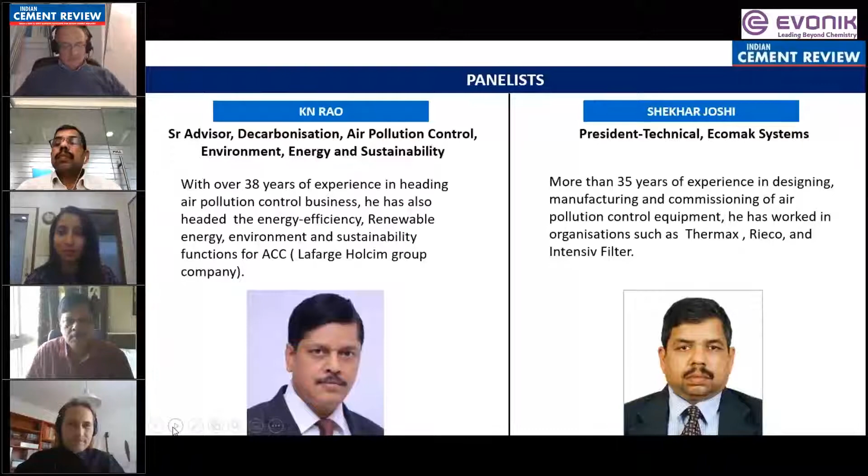Giving a perfect start to today's panel discussion, Dr. Santorsola and Dr. Rathwallner are going to make a presentation. Dr. Santorsola will introduce us to the P84 fibers, while Dr. Rathwallner will showcase some success stories of cement plants in India where P84 has helped meet emission requirements after premature failures. So with that, over to you, Dr. Santorsola, to take this forward.

You should be seeing my desktop, gentlemen. Good afternoon, everybody, and welcome to this first webinar for India, giving your process filters a second life. I would like first to introduce P84 fibers to all attendees by showing this image of natural gold yellow fibers. You may retain this information from this slide: P84 is the only hot gas filtration fiber presenting an irregular and multi-lobed cross-section. P84 staple fibers and multi-filament are available in the Evonik portfolio.

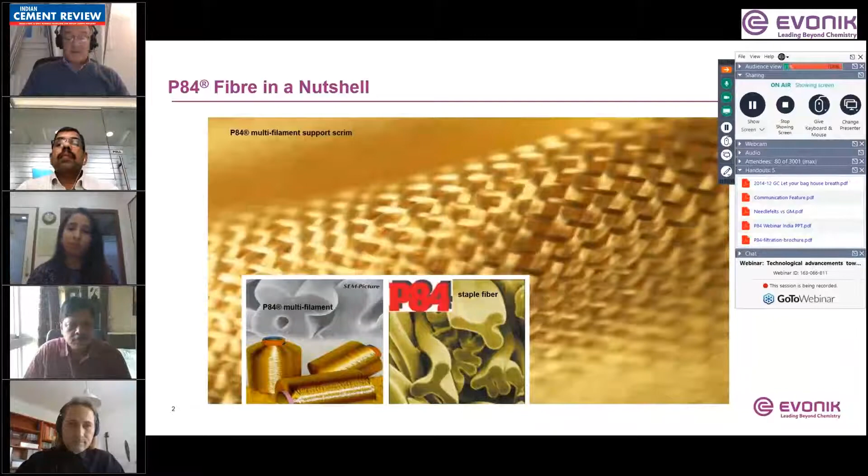A little bit of history of this fiber. It was born in Austria back in 1984. It was immediately clear to us that its most important characteristic was the multi-lobed cross-section.

For more than 30 years, we at Evonik have delivered to the cement industry effective solutions for hot gas filtration thanks to the properties of our P84 fibers. Recently, we have increased the range of P84 fiber qualities with the 1.3 dtex, and last year we launched P84HT, an optimized version of our fiber with unmatched thermal and mechanical properties.

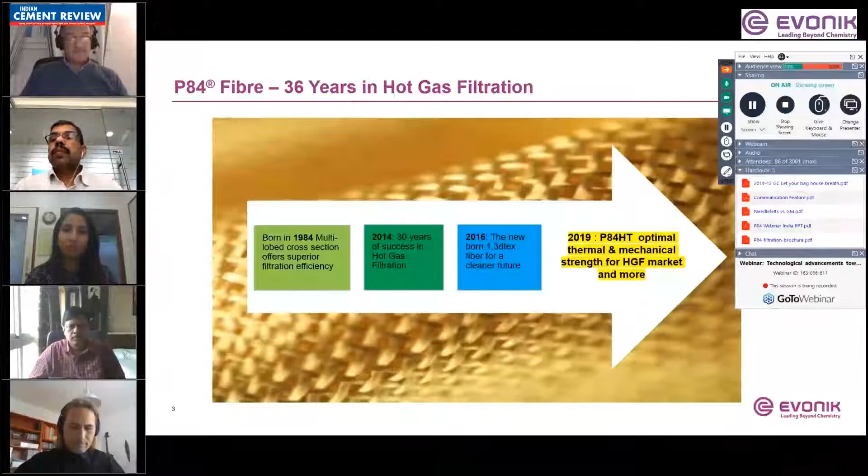Here we are. This is a picture showing where P84 has its home. We have the only production site in the world, located in Schörfling and Lenzing. The spinning is located in Lenzing, and the after-process and the offices are located in Schörfling. This is in the lake area of Austria, a very nice place near Salzburg.

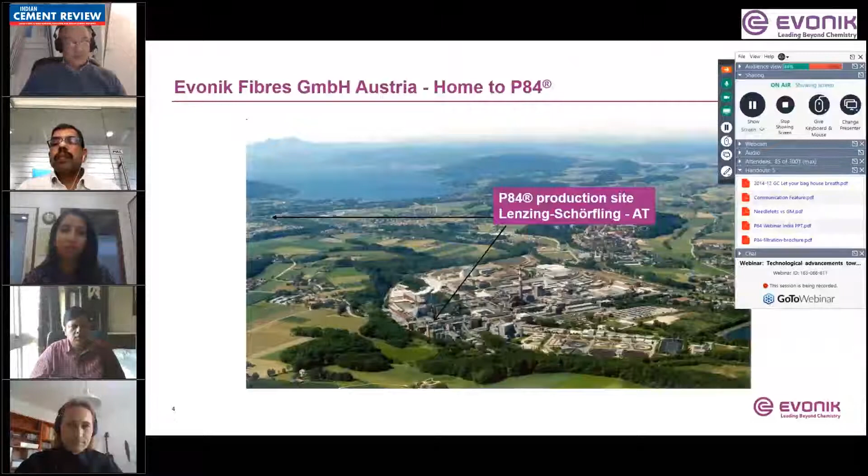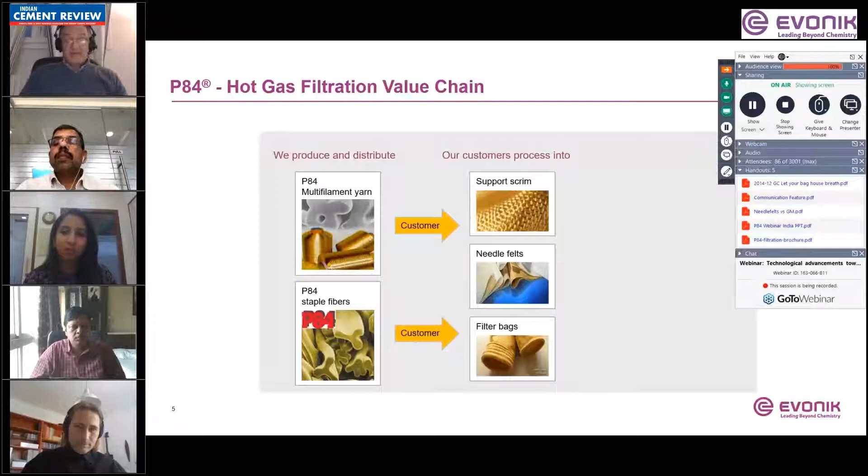Now, a few words on the hot gas filtration value chain. Evonik fibers P84 staple and multi-filament are offered to our direct customers in the textile industry. They are able to process P84 into support scrim, needle felt, and finally, ready-made bags, which are delivered to your cement plants, as you can see from this animation.

Since our position in the value chain does not allow us to serve you as vendors, we have developed a wide range of services, creating good value for your operations and allowing us to share our more than 30 years of expertise with you. Our very well-equipped laboratory of chemical analysis and our skilled colleagues offer you the possibility to verify the composition and construction of your filter media, your filter bags, and their chemical and physical condition even after several years of service, thanks to the use of specific analytical instruments.

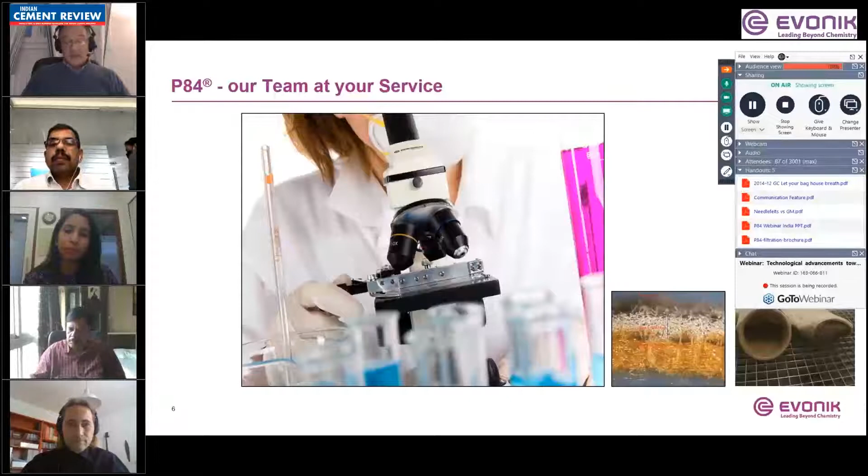Furthermore, we are glad to assist you in recommending dedicated filter media for your most challenging applications. We are also able to assess the performance of existing filter bags and execute in situ gas measurements.

Now, I would like to guide you through a brief description of the two major categories of filter media. Let's begin with the well-known woven glass with expanded PTFE membrane.

This filter media is characterized by a PTFE membrane laminated onto a glass woven base. As we see, there's a very thin line attached to the woven components, which is the dark blue or light blue one. The membrane is actually the only part which does the filtration, but it is also fragile.

It must be really protected during storage, handling, installation, and operation. Otherwise, abrasion can occur easily, and abrasion of a PTFE membrane is equal to emission at stack.

You see also that during operation and after pulse-cleaning, the PTFE membrane remains almost totally exposed to the gas flow. It doesn't retain much dust, as you see from this picture.

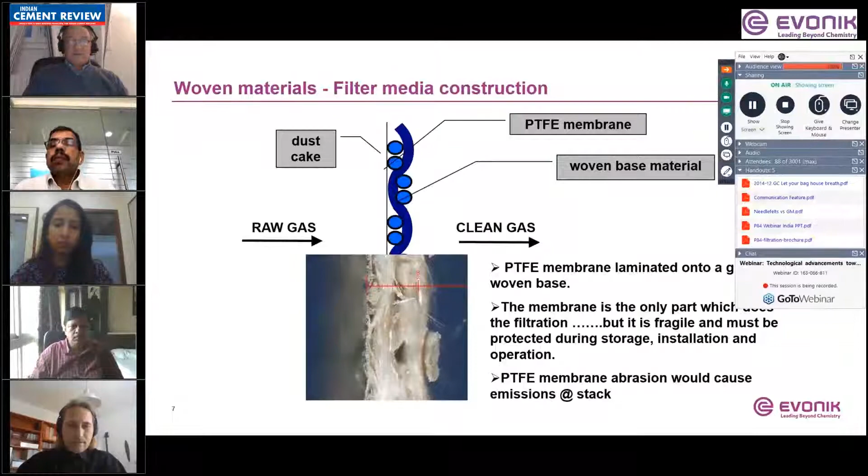High-performance needle felts are a very different type of filter media, different from the previous one. As you see, they are characterized by a three-dimensional structure where there is a supportive scrim between two non-woven fiber beds. In this case, P84 ensures a porous and permanent dust cake during operation.

I would like to show what happens during the initial phases of a P84 bag pre-coating. You see that a certain amount of dust is coated onto the fibers, and only after process dust arrives can we allow jet cleaning, which removes the dust from the process but leaves the pre-coating dust there, effectively protecting the filter media.

High efficiency filtration, in fact, is a unique characteristic of P84, together with its mechanical resistance compared to the PTFE membrane mentioned before.

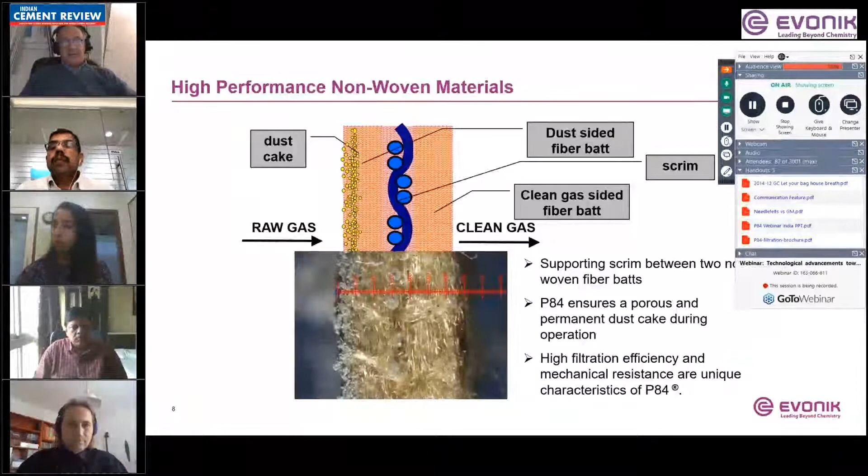And here is a nice cross-section of a P84 needle felt after operation. This one is even better. This image refers to a cross-section of a P84 needle felt, again, as I mentioned. The most important feature here is the formation of a porous and permanent dust cake, which plays a determinant role in preventing fine dust penetration and the consequent increase of pressure drop across the filter.

By achieving these two important targets, the bag life is also extended. You can really see how well-defined the dust cake is on the P84 filter media, and the rest of the felt is totally free from dust and free to breathe, allowing good operation for your plant. So we have a certain number of benefits offered by P84, which include low pressure drop, low emission, and long bag life.

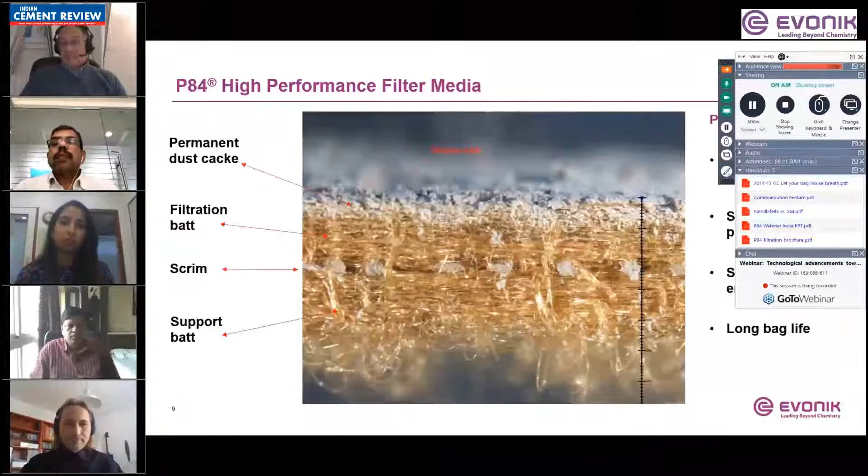But how to explain this particular high performance of P84 compared to any other fiber in the market? To do that, we have to go back to the structure of this fiber to understand its behavior.

Furthermore, the specific surface offered by P84 fibers - if you consider the weird shape, even their circumference is increased compared to any other fiber of same dtex. So we have an increased specific surface of 65% compared to standard fibers, and that's a tremendous advantage when we talk about filtration.

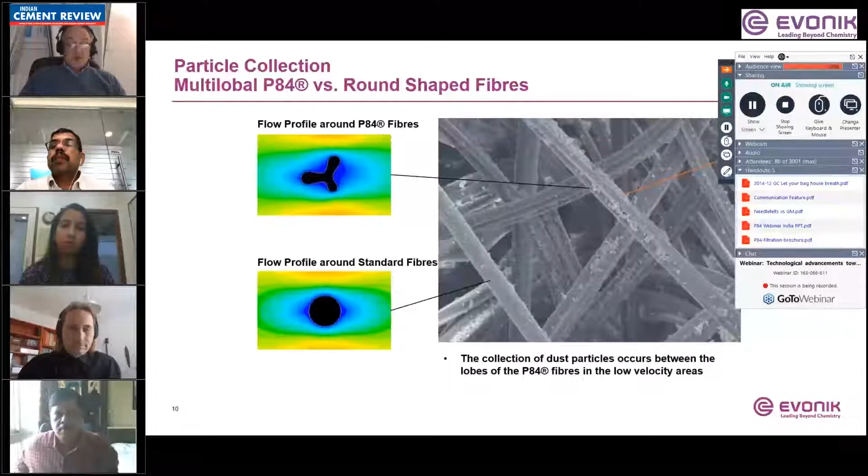This translates into a very important advantage for you when evaluating baghouse expansions to cope with increased production capacity, which happens quite often nowadays. So giving your process filter a second life, which is the title of this presentation, really means that: by adopting P84 media, you would virtually increase the filter surface of your baghouse without needing to add any compartment.

That means zero capex. P84 fibers provide an extended specific surface at microscopic level, as shown in the previous images, which allows your baghouse to operate at higher air-to-cloth ratio, up to 1.4 meters per minute, without requiring additional compartments. This is quite something, I believe.

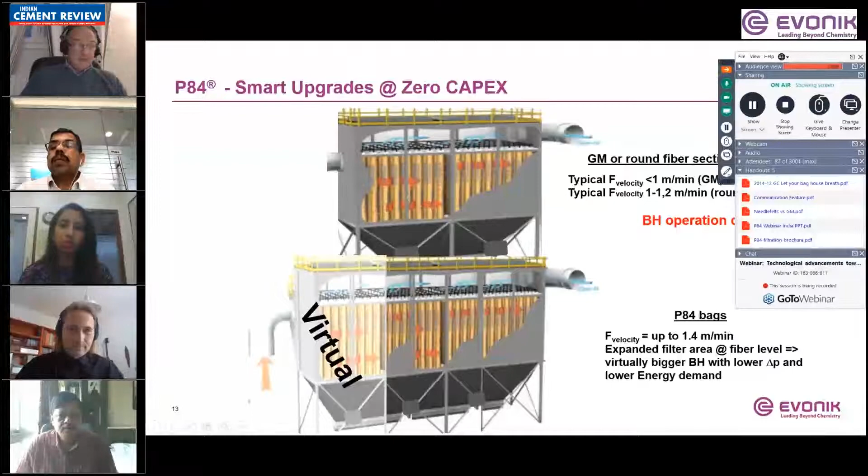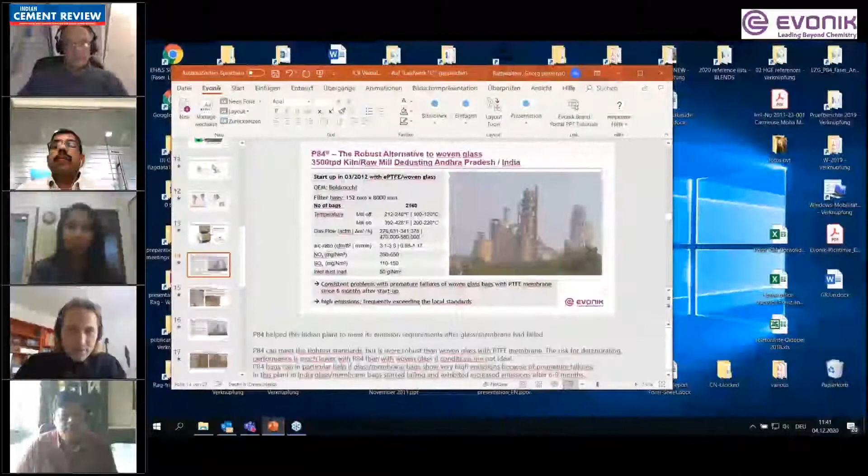Yes, we can. Perfect. So after the more theoretical introduction, I want to now show you a few practical examples of how P84 could overcome problems in plants with kiln baghouses which occurred with woven glass.

This first plant is in Andhra Pradesh. The baghouse was installed, and within 6 to 9 months, the woven glass bags started to fail, which resulted in higher emission. They have also tried other bag suppliers, but regardless which supplier, it was obviously related simply to the material quality - woven glass, which was not suitable for the conditions in this plant.

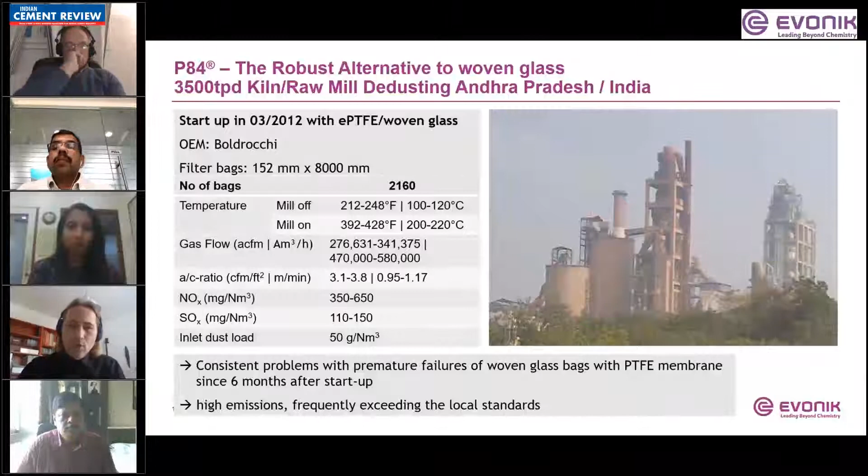The damage pattern looks quite similar in most cases with woven glass, since it's in most cases mechanical damage. It's starting at the contact point to the cage wires, either because the membrane starts delaminating due to mechanical stress, or because abrasion starts from inside. The result is the same.

You see small holes, and this shows the cleaned starting hole. You see that many of the glass fibers are already broken. It's difficult to judge whether the membrane breaks first or whether the glass fabric started breaking and then the membrane was tearing. It doesn't make a difference - the outcome is the same: you will observe increased emissions.

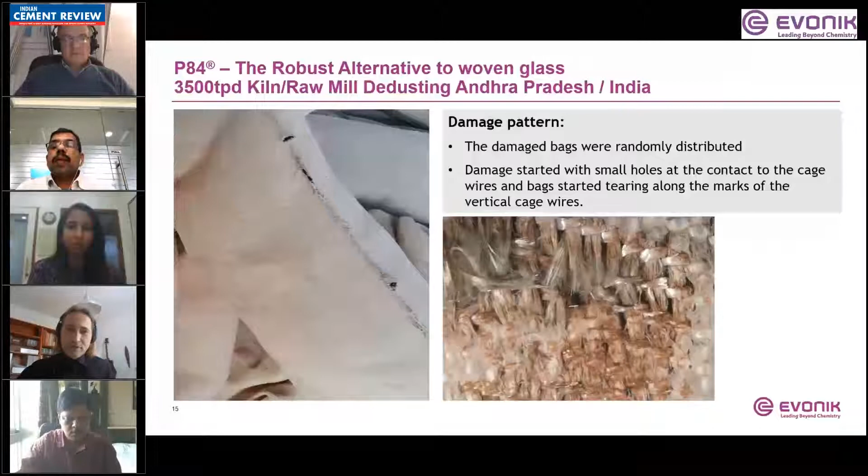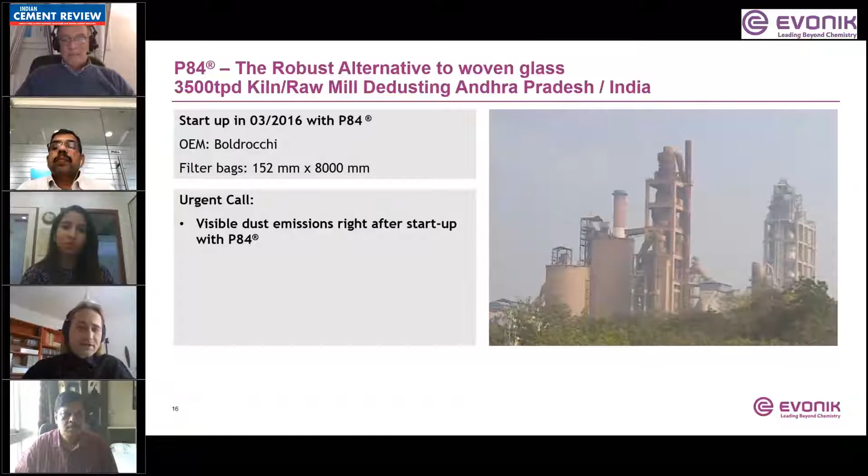So finally, after several other approaches, the operator decided to go for P84. Along with the OEM Boldrocchi, the bags were ordered and installed. But right after startup, I received an urgent call that they had visible dust emissions right after startup. So it was clear the emission cannot go through the bags - it's impossible to push so much dust through a P84 bag.

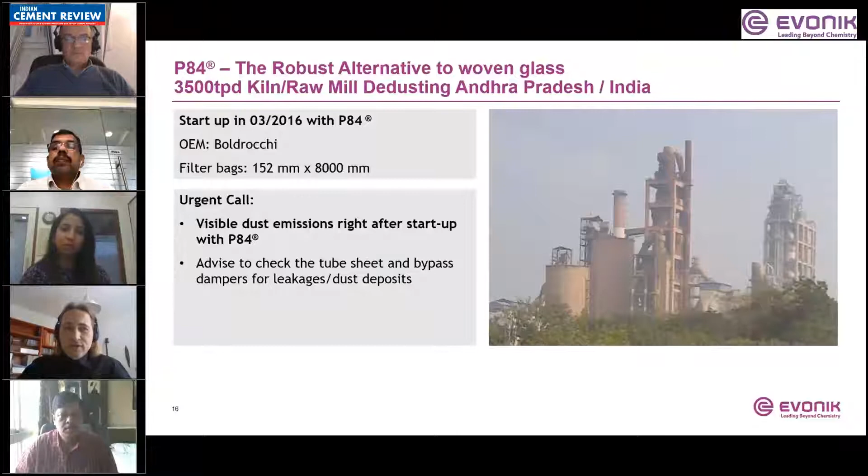So I advised to check the tube sheet, the bypass dampers, and also the clean gas duct for any leakages or dust deposits. 24 hours later, there was no dust coming outside of the bag or the stack any longer. They found a dust deposit in the clean gas duct, removed it, and everything worked perfectly.

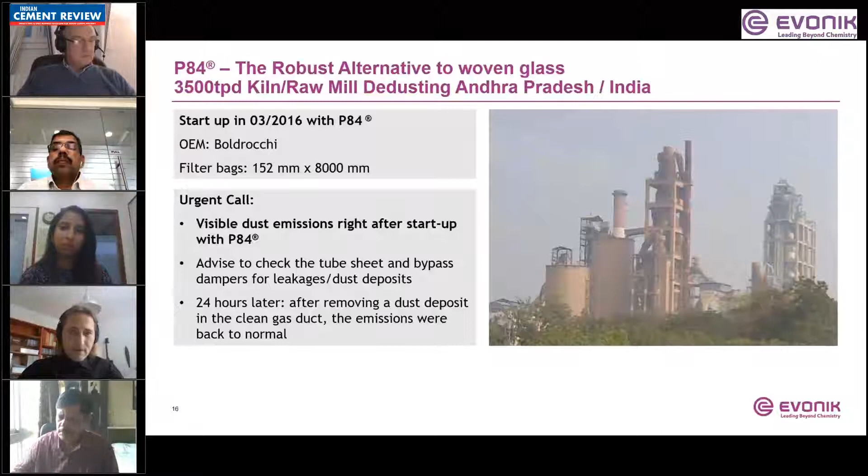After 1.5 years, we analyzed the used bag, and you see there are still orange imprints from the cage wires. There are still corroded cage wires, which created damage to the membrane bags. But within 1.5 years, none of the P84 bags shown any fatigue.

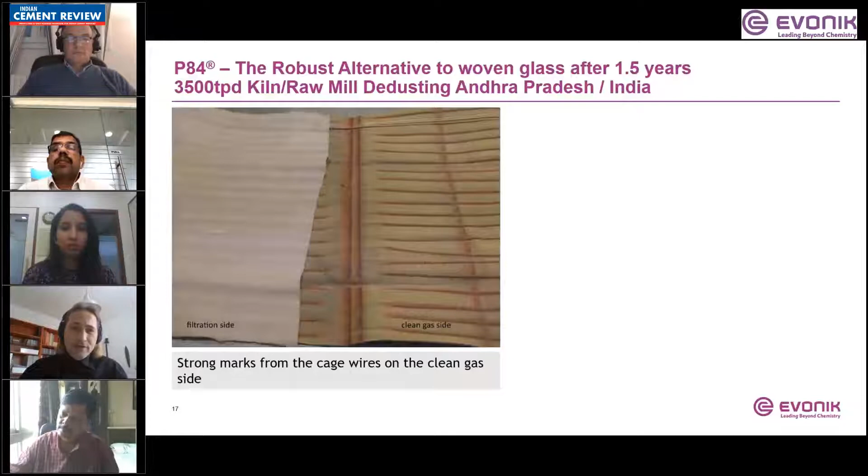And not only the corrosion of the cages - this was roughly a handful of corrosion products which we found inside the bag, biggest share coming from corrosion of the clean gas plenum. And even though this does create some abrasion, a needle felt has also a non-woven wear layer on the clean gas side, on the cage side.

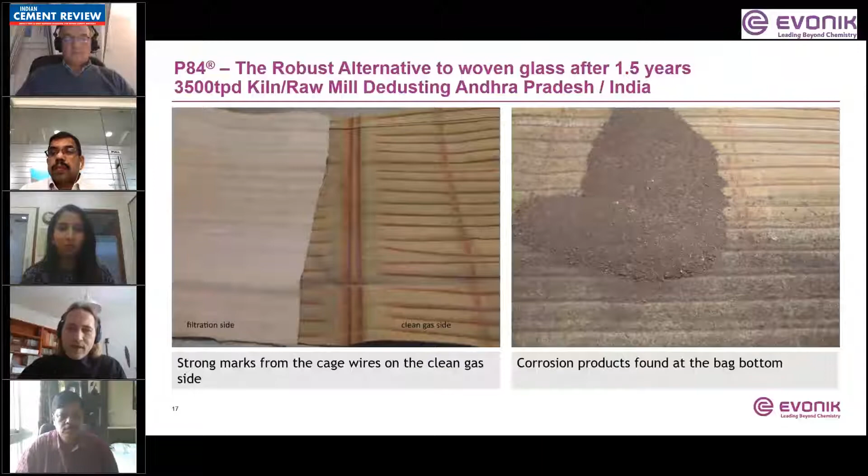So this wear layer can be abraded without any damage to the bag and performance. This picture shows right at the contact point to the cage wires, there's no corrosion, there's no damage at all. You see just the orange corrosion products on the bottom on the clean gas side and the permanent dust cake on the dust side.

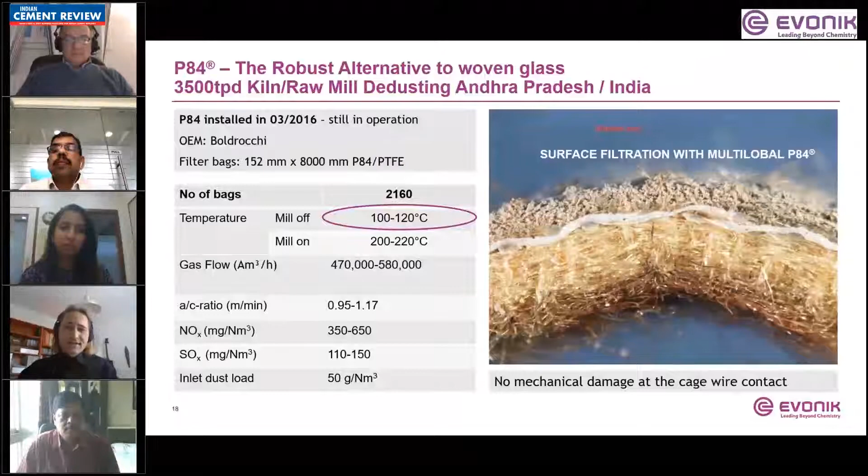The problem in this plant is mainly the low operating temperature in direct operation, which is just around 100–120 degrees C, which easily leads to condensation and corrosion of the mild steel housing of the baghouse.

The former Lafarge and now Nuvoco Vistas plant in Sonadih is another example. This was a hybrid baghouse, and the design in hybrid baghouses typically is more aggressive than in a full baghouse. So the AC ratio was 1.2 meters per minute, and they observed damage mainly at the inlet, but after replacing failing bags, the damage extended to the entire baghouse. Switching to P84 solved the problems. They have no premature bag failures, or just very, very little, which do not demand additional maintenance shutdowns.

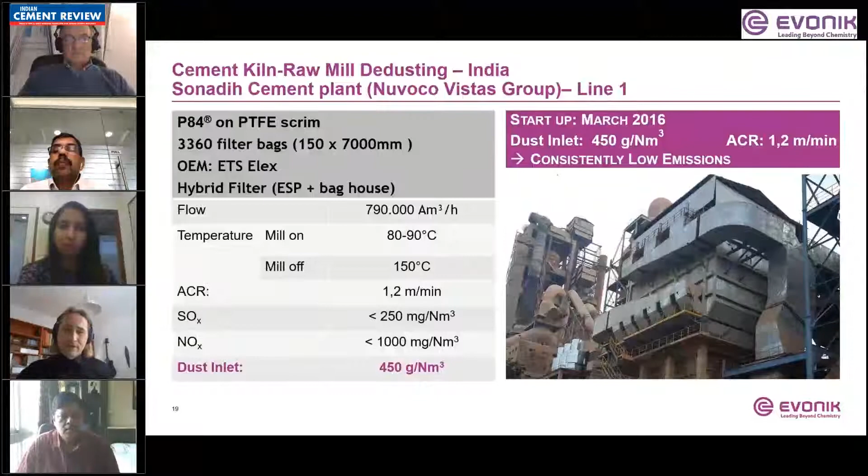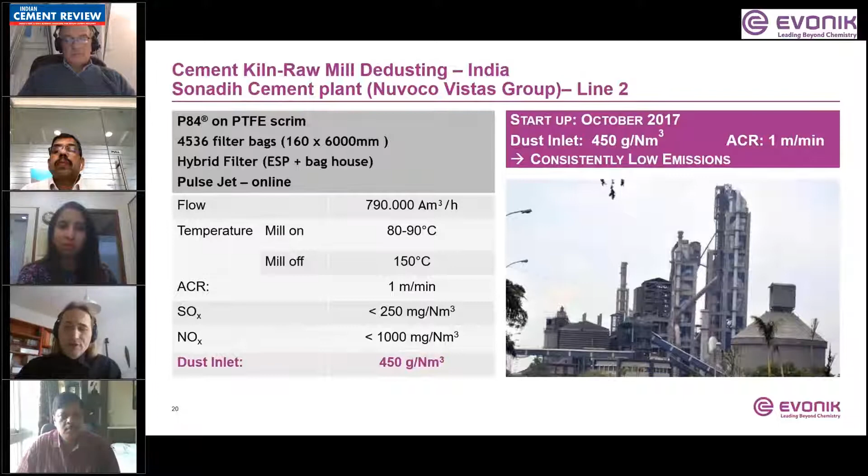Another hybrid system at the same location, but a different OEM. A little bit lower AC ratio, but it may also be that the gas distribution across the baghouse is not even. So locally, you may still have positions where you exceed the limits for woven glass.

The second former Lafarge and now Nuvoco location is Arasmeta. It's a 100% baghouse with an AC ratio slightly above 1 meter per minute. There was quite stochastically distributed bag failures, and the main reason was too much mechanical stress. The solution, which is proven now, was P84, like in the other cases.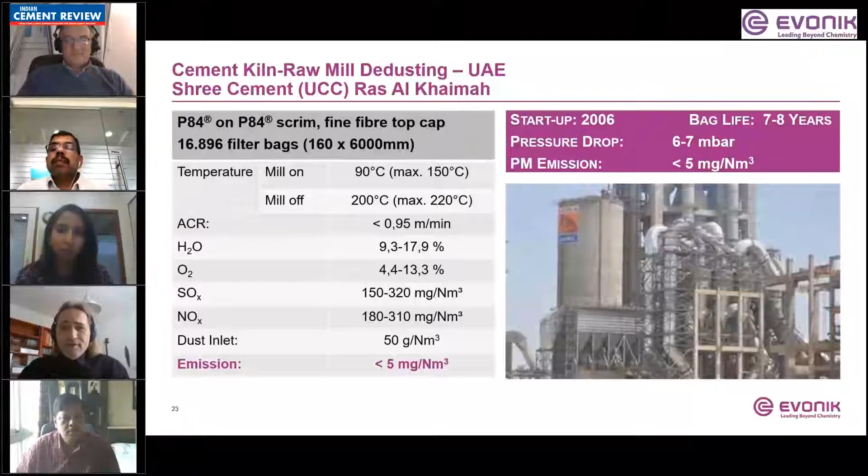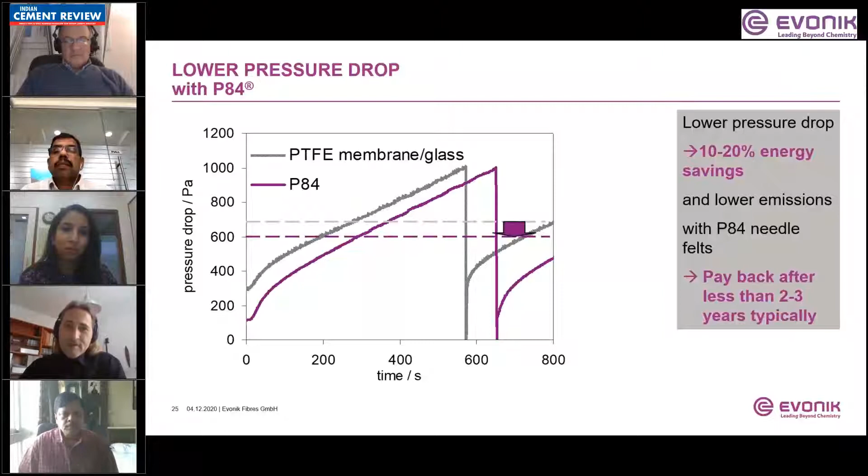So we did a calculation for 666 cubic meters per second. This is roughly 40,000 cubic meters per minute, equaling a baghouse in the size of 40,000 square meters, which roughly equals a 10,000 ton per day kiln. We can make this calculation also with your energy costs, your pressure drop experience, but with this difference, we could show the difference in energy costs is more than $100,000 per year, which is more than 10% of the bag costs per year. So the typical payback of P84 bags, even if a woven glass bag is performing very well for 2-3 years, is typically not more than 2-3 years.

And for the rest of the life of P84 bags, you save more money and you can sleep well because you know that the bags will perform well.

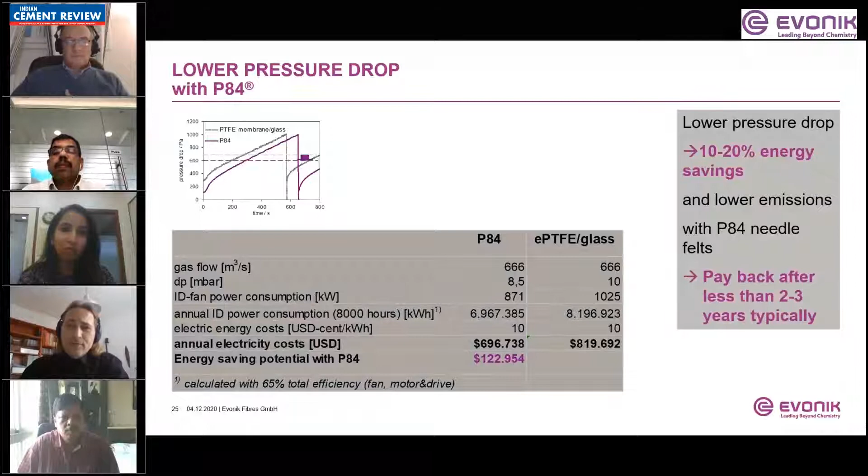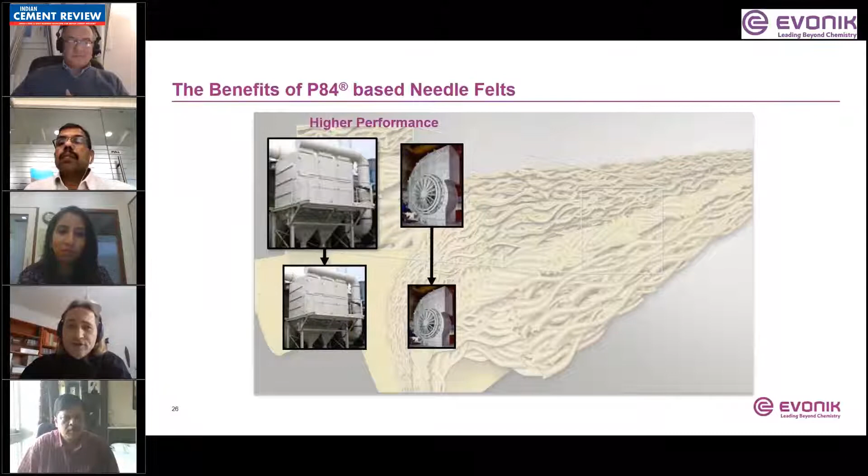So in summary, due to the higher performance of P84, you can keep your baghouse smaller. You can also keep your ID fan at a typical regular size, and you don't need to increase it because of a high pressure drop, which means low cost, along with a reduction of the total cost of operation.

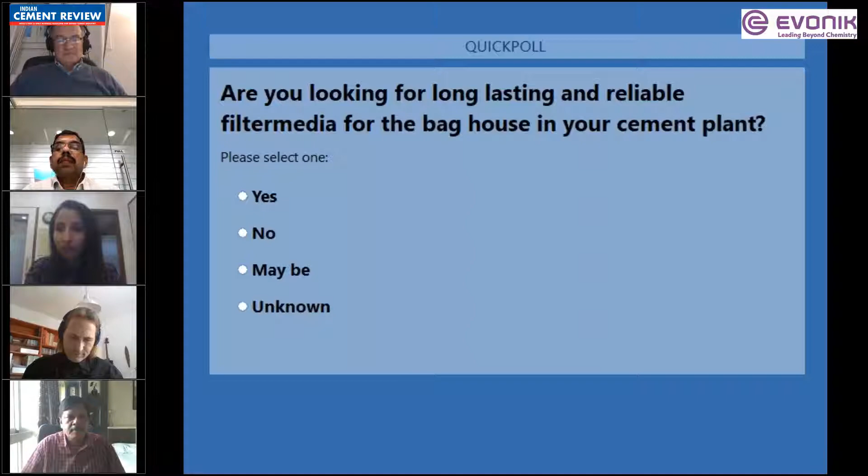Then I would move on to Dr. Rathwallner to discuss this a little more. Right now we're seeing that the majority is going with yes, followed by a small percentage that says maybe. We have about 70% plus saying yes, 20-30% saying maybe, and a 10% that is unknown. I'm closing this poll now. Here's the result for all of us to see: 64% yes, 27% maybe, 9% unknown.

So from there, Dr. Rathwallner, how can companies improve baghouse performance, like selecting the right filter media? We also know that P84 comes with a USP of highest filtration efficiency. So how does this become important, and how can companies improve baghouse performance?

Like mentioned in the introduction by Stefano already, a membrane on woven glass works ideally under ideal conditions. Under lab scale conditions, you see almost zero emissions and it works perfectly. But under real conditions, it's different. It doesn't even start with the condition of the baghouse—it starts with well-trained personnel to install the bags properly. You can make a lot of mistakes and damage the bags already during installation.

This was the reason for our big success in China, because in China the conversion from ESPs to baghouses has taken place in a much shorter time period than in India. I would estimate some 60-70% have been converted within 2 or 3 years. Just before this happened on a big scale, I recognized that woven glass is not working perfectly in China for various reasons—it's either the material quality, or within woven glass itself there's a wide range.

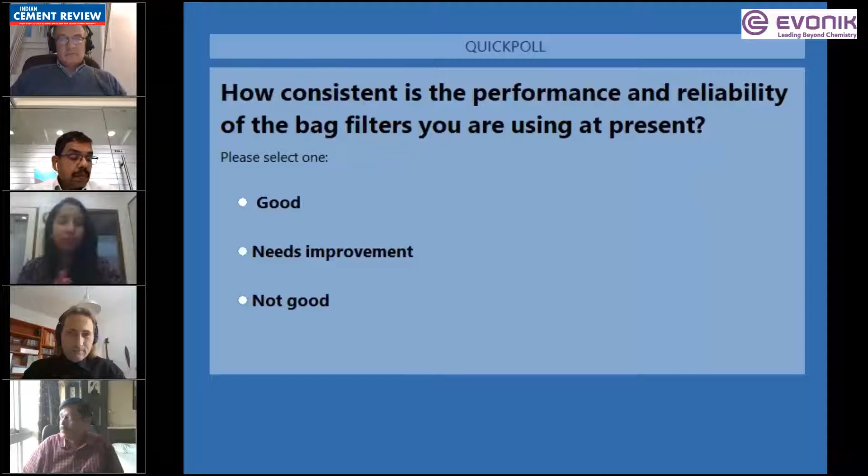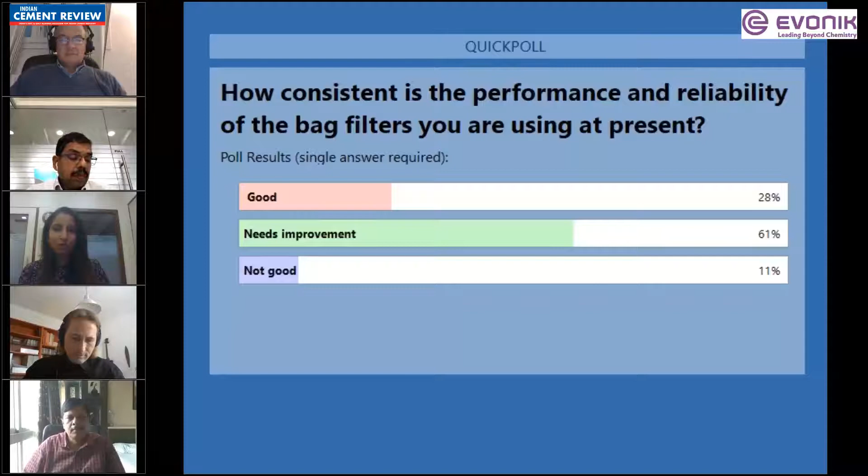So I'm seeing right now with the results, we have 64%, and it's going up, which says needs improvement. Around 20% says good, 12% not good. I'm collecting the responses, closing the poll, and sharing the result. So yes, Dr. Santorsola, we can see we have 61% that says needs improvement, followed by 28% that says good, and 11% that says not good.

So how do P84 polyimide fibers perform better than the woven glass, and to what extent do these reduce risk for deteriorating performance and add to the life of the cement bag? Thank you, Shriyal. Very nice question, and also very self-explanatory result of this second poll.

We have more than 60% of users in cement industry which declare that their filter media could perform better than what actually is the performance. So this tells us a little bit everything. As Georg also mentioned before, as long as a PTFE membrane on a woven glass operates under very precise and strict conditions, these media can perform perfectly as long as it lasts the required number of years.

As long as it lasts for 4 to 5 years, nobody should change it. But this is not the case, and the picture given by the second poll is clear, that the PTFE membrane indeed is more fragile and subject to premature failure. Call it abrasion from the flue gas, call it mechanical damage due to the impact of the woven glass on the cage during the pulses, etc., or even during the handling of the bags, even before installation.

So the question, I believe, is the following: do we know exactly how much this poor performance of glass membrane is impacting on our balance sheet? Sometimes I believe the response is not completely, because what people tend to do is focus on the price difference between a P84 filter bag and a woven glass filter bag, which is a very easy and understandable approach. You look at these bags and you see, oh, if I buy P84 bags, that would cost me, I don't know, 30%, 35% more.

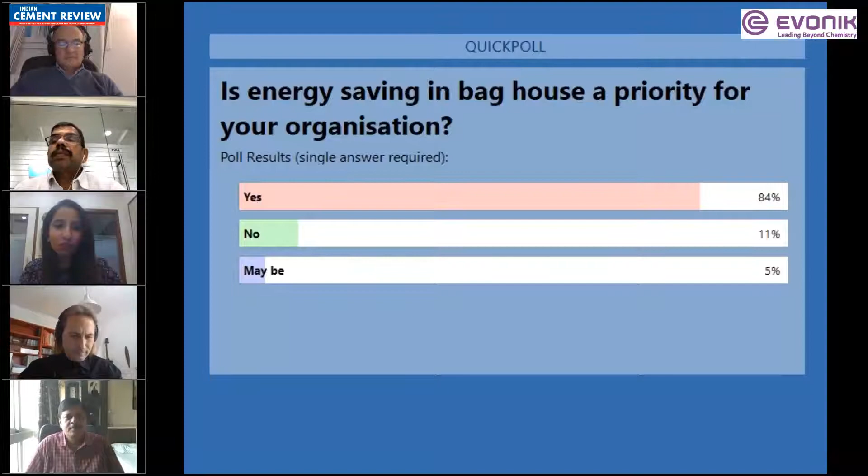It's hands down, and it almost went to like 100% yes. Now we're seeing more no's and maybe's. I'm closing the poll with that, and launching the result—let's conclude this session very soon. So we're seeing it's 84% say yes, of course, 11% no, and 5% maybe.

So who would like to take this up? Please, we have a few minutes remaining. We may even share, George and I, but I would say one thing: the picture is very clear. There's a very dominant majority of people understanding and accepting that energy saving is an important target for the operation.

Let's not forget, the ID-fan energy consumption is not the only cost. When things are not going right, as we mentioned before, there's another array of hidden costs, including unexpected maintenance and loss of production. These can be by far more painful than the energy cost saving itself. So let's talk, hopefully, of a total cost of ownership when we consider the selection of a filter media.

Then I would like to hand over to George, because indeed we have the possibility to analyze data from each and every plant and come to specific suggestions on ID cost. It almost looks like there would have been many technicians in the webinar, because we always get positive feedback.

Yes, of course, we understand we need more reliable material, otherwise it's their pain—they want to save energy. The problem is you need a holistic approach. It was not a cement plant, but a boiler plant, where we informed the maintenance engineer responsible for the baghouse that he could save that much ID fan power if he invested in better bag material.

And he said, 'I would be an idiot—that's not on my account. I'm only responsible for the bags. The ID fan power is on another account.' So we realized you need to go one level higher in management, so that at the top, people can balance and understand that an investment in one segment brings savings in another.

You need to have the entire picture. This is often a hurdle to really convince the top management that an investment rate will pay back relatively quick. In case of a shutdown, as Mr. Rao mentioned, that's what we have confirmed in many calculations. If you have a 10 days maintenance shutdown, which is not very long, if you have to find damaged bags and replace them, it costs more or less as much as an entire set of high quality bags. So with the first unplanned shutdown, if you could sell more clinker, you have already spent more money than you would have spent with the most expensive bag material available.

Thank you for that. And now I'm going to take the last question to conclude this entire discussion and summarize it. Considering the present scenario in India, I think we've had a lot of insights that have come into the forefront in this discussion. If each of the panelists have to share their expectation one year down the line, what improvements do you expect in the pollution control scenario in the cement industry? We'll take this very brief, very short from each panelist.